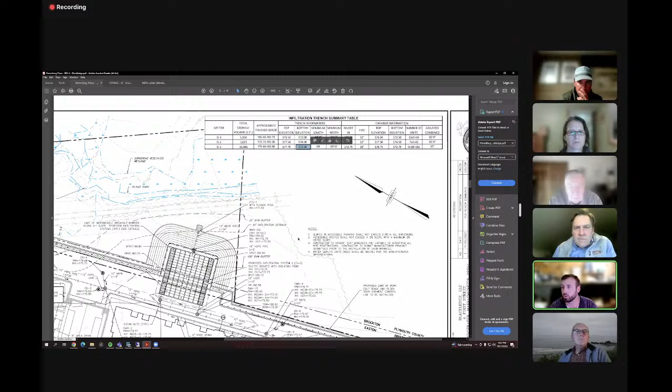The bottom elevation of the trenches is at elevation 172, which is the surface grade of the existing conditions under that. We found groundwater more than 4 feet below that by the test pits that were out there. So the water will infiltrate into the ground, and it really won't break out through the retaining walls in that area. It's getting pulled down by gravity through hydraulic conductivity into the groundwater system, and it is below the retaining walls, basically at that elevation.

And the mounding works in almost an upside down bell curve or a regular bell curve type situation where it spreads out, focused underneath the main part of the system, and then as the water infiltrates into the ground and hits groundwater, it slowly seeps out away and raises that, but then it falls back down. Groundwater is 4 feet below that system. So the flared end parts of that bell curve are 4 feet below grade at the lowest point there.

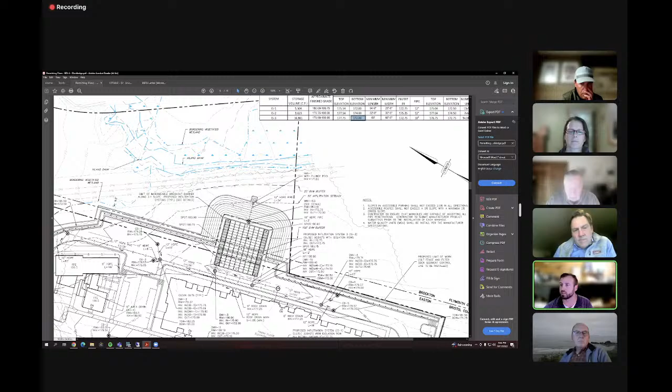And the highest point is actually underneath the chambers. So Damien, can you flip to the other ones? Because this one that you're looking at now, the large one, is primarily in Brockton, and the wetlands are all in Brockton. Okay, yeah. I mean, it's similar in all scenarios.

The main part of where the chambers are set, and then the bell curve and how the mounding and the interaction between the system and the chambers are the same. It'll be high during those stormwater systems. We'll have that arch underneath the chambers in which the water will infiltrate to the ground. It'll make the connection to the groundwater, and then slowly, as the water infiltrates, that mound will flatten out.

We set the distances and everything per stormwater standards. There's plenty of cover over the tops of these systems. The bottom of the chambers, again, these are 4 foot high systems, so the surface elevation, 180. You can see we're at 175 here. The bottom of infiltration chamber system, I believe this is 2, is at 74, and then also the other ones at 72. So those are all relatively at surface elevation or slightly below existing surface elevation.

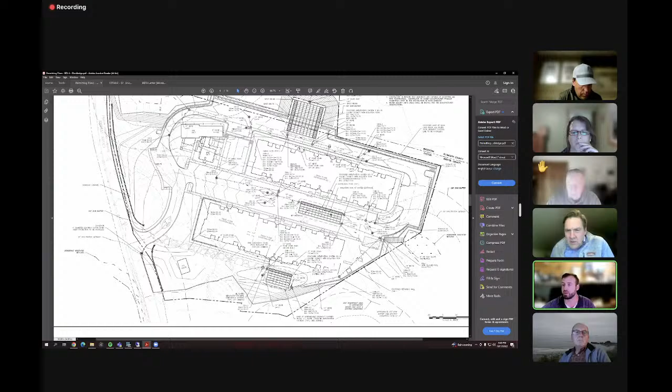So all of the other systems, everything is significantly higher above that. We're at elevation 180 at surface grade above this. So these chambers are deep in the ground. They're right up at 4 feet above groundwater at the tightest points. And the water should permeate down into the existing groundwater table, and have that bell curve edge outward.

So I guess the question that I have is, does water that doesn't actually make it into the actual infiltration basin, is it constrained at all by the retaining wall system? I can understand what happens to the water that makes it into the infiltration system, but I assume that there is regular groundwater that is meant to be handled by the regular ground as part of this development.

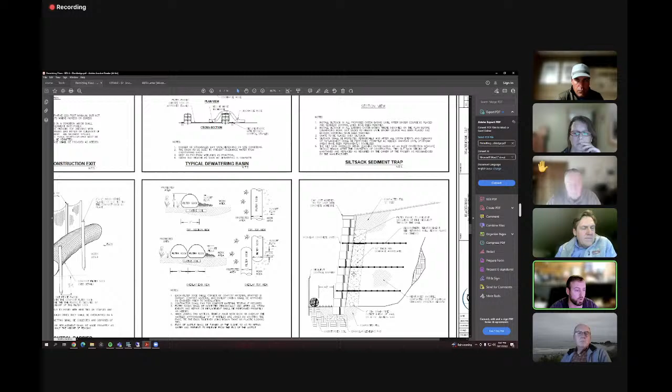The entirety of our site is above finished grade. So groundwater is below the surface elevation. So we are not restricting existing groundwater in any way, shape or form. The footings, the foundations for these retaining walls, are not very deep. They're only about a block or two below the surface, and then there's a crushed stone granular pad behind it. We're not by any means digging deep into the water, having these far impacts below surface grade. And they're held back by these tiebacks and the way that the blocks are built and constructed themselves.

So is the conclusion here that the groundwater is going to infiltrate to the normal groundwater level, which is below the level of the walls already? Yes.

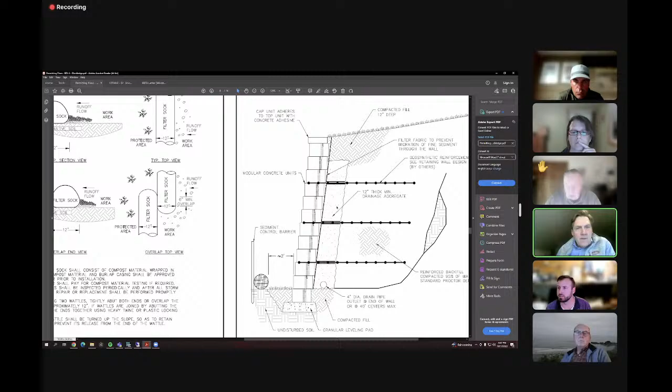Okay. Isn't this whole study based upon a late August sampling? When the samples were taken, it was among the driest years in recent history in the state. So I believe that what you're representing as the groundwater table is really underrepresented versus a normal year. Another thing that hasn't been mentioned is the effluent is going to be putting something like 2,000 cubic feet a day of effluent into this site.

I based that upon the data represented by the state for the average water utilization for different size apartments, and accumulated that, took no incremental data for the clubhouse, but that comes out to roughly 2,000 cubic feet a day. And I think that's in the northern part of the site. So I think there's some serious issues, and the McDonald-Morrissey analysis seemed to indicate that this should be redone in the spring to get an average representation, not in the middle of a summer drought reading. So I don't have any confidence in the data that is submitted and on the table right now.

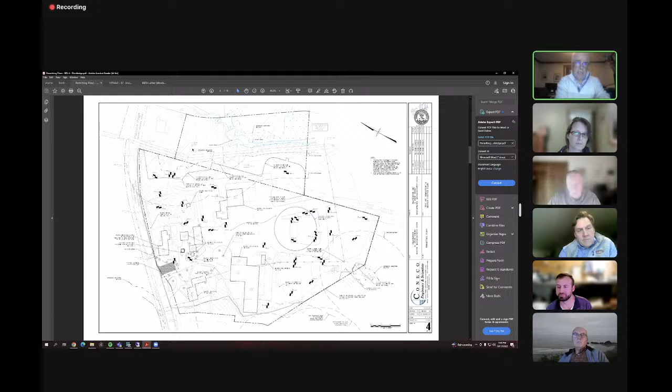In fact, we even eliminated one of the basins that were up closer to Union Street. Yeah, we eliminated that basin specifically on the basis of the setback from the leaching field. So, it's gone quite a ways in terms of what the design has gone through. And I feel very comfortable in terms of the prediction of the groundwater levels as they've been presented and as they are found.

So I guess that from my perspective, and then I'll open it back up to the commission now that you're with us, is that I'm trying to get the level of confidence necessary here to know that the discharge that's happening on both the subsurface system as well as the stormwater treatment systems is able to handle the volume that's going in here from a water standpoint, a runoff standpoint, or an effluent standpoint, and not impact either French Pond across the street or Dorchester Brook in the wetlands, even further south on the site.

So that's my takeaway at this point. I agree with Mr. Toohill's explanation earlier that we've probably concluded on the wetland delineation portion and the remediation and the replication standpoints that have been incorporated into the plan. And I think those issues are behind us. The issue right now in front of us is, are we going to impact either Dorchester Brook, the wetlands, or French Pond across the street with the increased water that's coming off of this site?

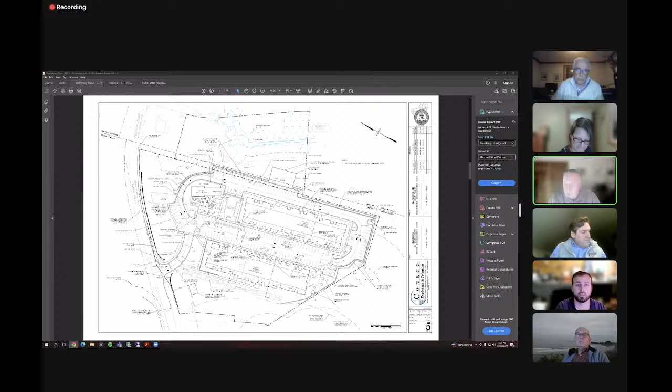Yeah, I'd like to get their comments on when they went to the state, they represented this as an unconfined aquifer. And I still believe that with all the retaining walls around, I have a hard time getting there. But when you add the 2,000 cubic feet a day of effluent, it kind of begs the question, if that's wrong, what are the effects going to be? And I hazard a guess they're going to go largely toward the pond across the street and into Dorchester Brook. And it was very notable to me that Mr. James would not comment on the effluents that were going to be released on the site. And I'd like to have his comments on why he doesn't stand behind those analyses.

Just hold up, Mr. James, one second. I just want to give Nate a chance to add anything in here. Then we'll circle back to that. I'll give you a chance to respond to that, of course, because I do want Mr. Benson's concerns addressed. I have no comment at this time. Okay, Mr. James or Mr. Dimitri?

Admittedly, I cannot speak to the groundwater discharge permit and the issues associated with it because we didn't review it. We specifically only looked at the issues associated with the stormwater system on the backside of the system. And I pretty much had to depend on the Commonwealth and Mass DEP in terms of their analysis and review of the groundwater discharge permit. The only thing I will say is that we are quite a ways away from it in terms of the stormwater discharge, the 3 infiltration systems. I believe we're about 175, almost 200 feet away.

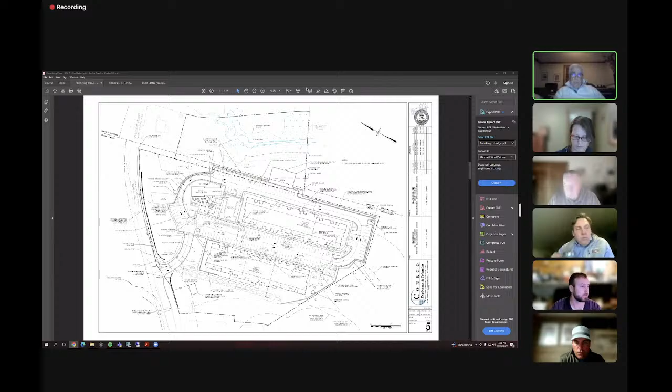Yeah, quite a distance. So in that sense, I really wasn't overly concerned with the overall issues associated with the mounding on the subsurface disposal system. How far away are you from the effluent system? I believe we're about, I'll let Damien answer that. Yeah, let me pull it up so I can get you a good number here.

So to the closest system, the underground chambers, is approximately 230 feet away. I'll just check them all. About 200 to the closest one, and that is the one along the westerly side of the site, the one that's closer to the riverfront. So that's the infiltration chambers to the leaching field. Yeah, so that pretty much confirms it. That's one of the reasons why I wasn't overly concerned about it and pretty much left the issues associated with the mounding analysis to the review by the department.

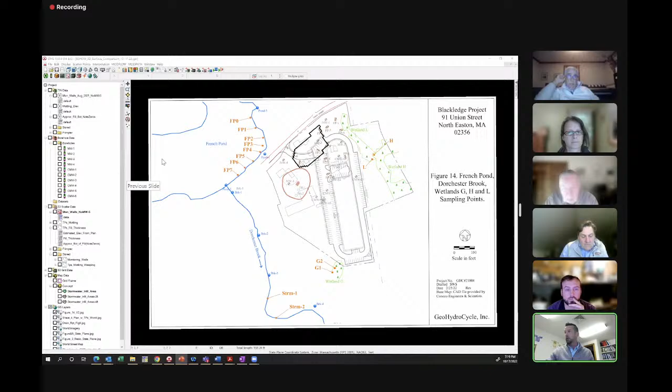Okay, so we've got this graphic up here. This is a site plan actually from the groundwater mounding analysis that was done for the wastewater system. So we can see some of the key site features on here. You can see the positions of the site monitoring wells. I can highlight those. Okay, where you see the yellow points come on, those are locations of site monitoring wells. They're screened in the shallow aquifer, so they support the direct measurement of the position of the water table, and that's where those August water level measurements were collected.

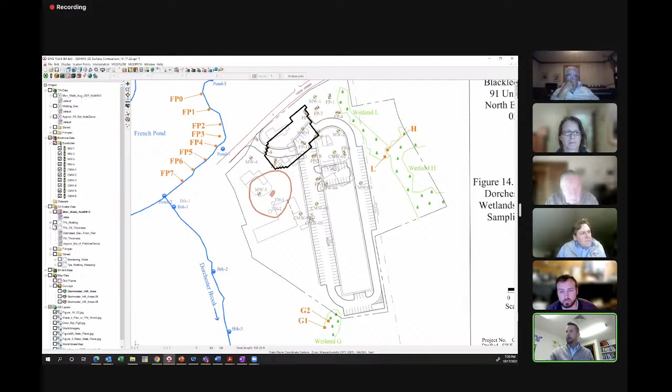We also have test pits on site. I can turn those on. These are the positions of the test pits. I can flip this figure off and show you that those gray locations coincide with, and a figure will come up here, coincide with these positions of the test pits. Okay.

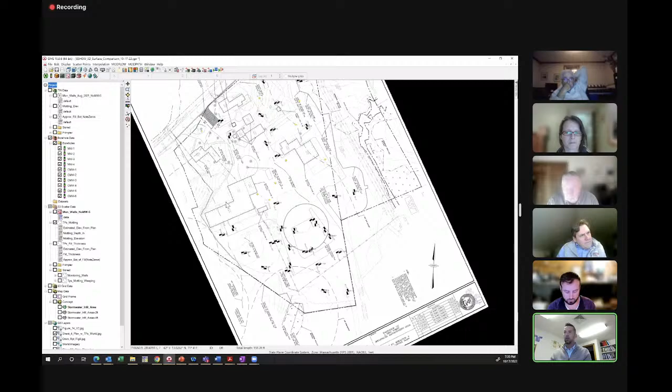So what we can do is, by taking the depths that have been reported within the soil column by the applicant, where redoximorphic features of soil mottling were observed, we can create a surface that represents where those are positioned in the subsurface. And we can do the same with the groundwater elevations that were measured in August of 2021. I'm going to turn those two things on here one at a time.

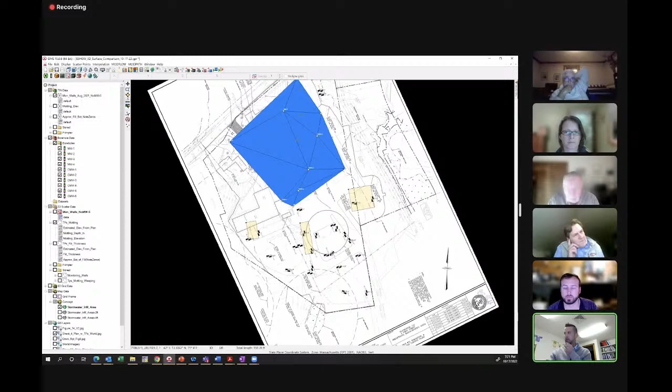Here's the groundwater surface. It only extends over a portion of the site because the monitoring wells don't extend into the southern area where the stormwater infiltration is proposed. And I can show you where that is. These yellow areas are the approximate extents of those 3 infiltration systems, stormwater infiltration systems. So we don't have monitoring wells in those areas, but we have some that are relatively close by. And now we can turn on the surface that represents the soil mottling elevations.

Okay. Now what you're seeing here is some areas where the red surface, so where the soil mottling occurred in the subsurface, does rise above where the blue surface is. And that would make sense, right? If those redoximorphic features were representative of the highest condition, that's what we would anticipate. That red surface should be above. And that does occur in the northern part of the site in certain areas where there is not significant fill.

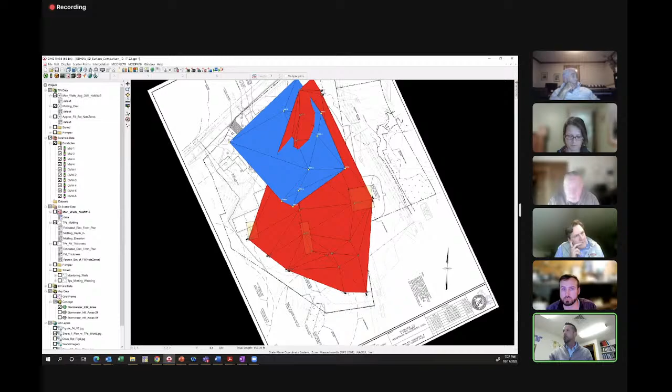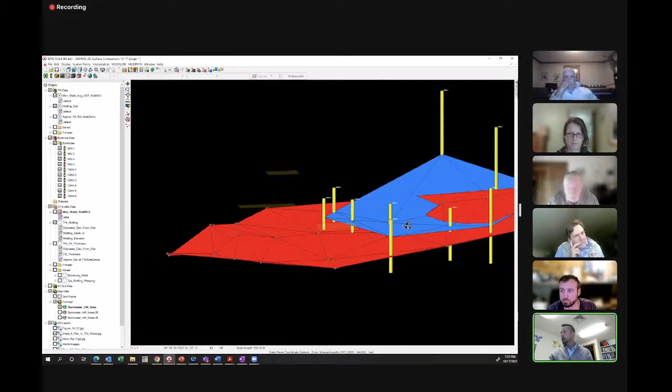But as you move south on the site, we start to see this separation. And if we rotate in space here, you can see, and there's vertical exaggeration here, but you can see what I mean, right? So we're moving south and we're seeing that blue surface rising above where the redoximorphic features were observed. So that's saying in those areas that the water table at this low point in time in August of 2021 was somehow measured at an elevation that's higher than what the applicant in general is using for their estimated seasonal high groundwater condition. And so that's dangerous for a variety of reasons, right?

There's also the 4-foot criterion. So if there's less than 4 feet between the bottom of the proposed system and the estimated seasonal high groundwater condition, you need to perform an additional step of analysis.

And that's a mounding analysis that focuses on the degree of change, temporary rise in the water table caused by infiltration from the stormwater system. And I'm a little concerned about what I heard before, because Mr. Dimitruk talked about, well, groundwater is not really going to change as infiltration occurs, but then he said it will locally below these systems. Well, that latter description is correct.

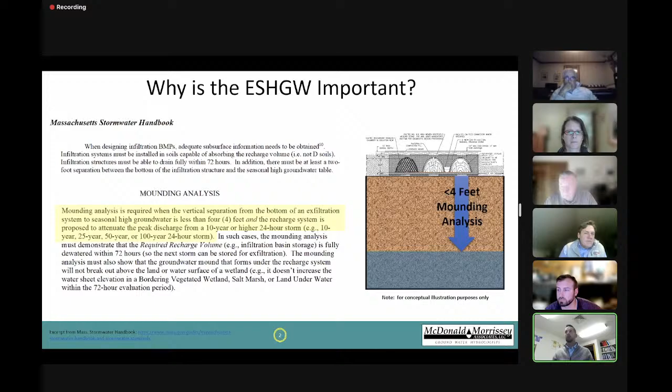Groundwater will rise below these systems, and the degree to which and the lateral extent to which that groundwater will rise has not been looked at all to this point. You only get a look at that if you perform a groundwater mounding analysis. And the risk of not performing that analysis is the possibility of adversely affecting the infiltration of these systems. And I talk about this in the letter.

If those systems don't infiltrate as they're designed, you're not going to get as much recharge. And that's one requirement under the stormwater performance standards. So that reduction could invalidate the compliance with that stormwater standard. And then you're probably going to see the system react by pushing more water out and increasing the maximum discharge rate. And that's another stormwater performance standard that needs to be met.

So to me, the issue here is that this estimated seasonal high groundwater condition is clearly, objectively, based on these measured water levels, low. The question is, how much higher is it? What I can say is I've reviewed Mr. James' comments about the applicability of the Frimpter analysis here, but I think he sort of misses the bigger point.

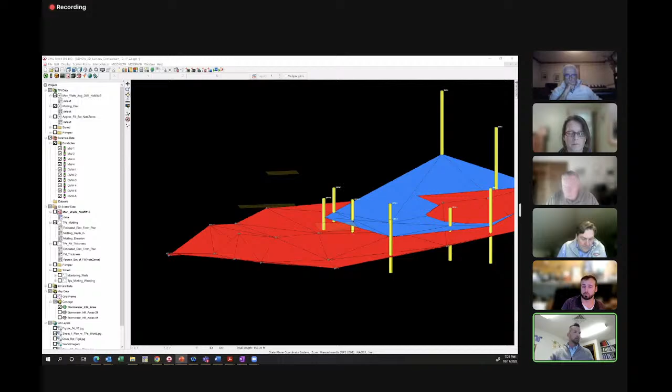When I did that exercise, it was simply to explore another option that can be used to evaluate estimated seasonal high groundwater conditions. I wasn't attempting to propose design levels. I was simply trying to support this observation that what's being used is too low. What really needs to be done here is to fill this information gap. And I think, according to the Mass Stormwater Handbook, the best option here is

pretty well spelled out. I'm reading from the Mass Stormwater Handbook here: when redoximorphic features aren't available, which I'll contend in this case they're not reliable, installation of temporary push point wells or piezometers should be considered. Ideally, such wells should be monitored in the spring when groundwater is at its highest, and the results should be compared to nearby groundwater wells monitored by the USGS to estimate whether the regional groundwater is below normal, normal, or above normal. That's what I'm proposing here.

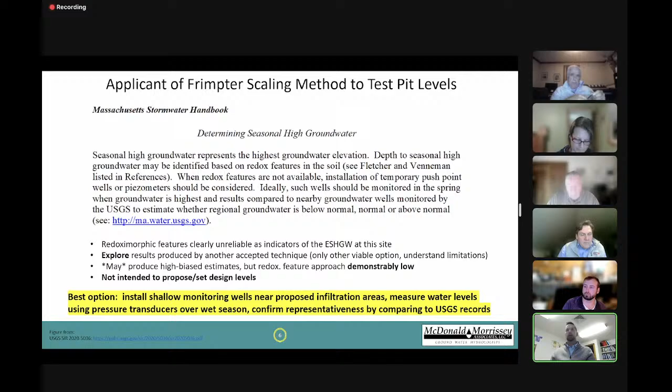We need to install additional monitoring wells in these areas where stormwater infiltration is proposed. They need to be monitored at a high temporal frequency using pressure transducers that go right in the wells, and they alleviate the responsibility of having someone go out and manually measure and the possibility of missing the high condition. And then you need to evaluate versus the USGS records to make sure you're getting a representative wet season captured in the data record. Okay, so that's one issue.

Just quickly, I want to touch on the wastewater issue. I can appreciate Mr. James saying he didn't review this. The fact of the matter is there is an analysis here. As I spell out in my letter, I've gone through a pretty significant effort to recreate the applicant's consultant's model to the best of my ability based on the limited information they've provided, which is incomplete. But I'm producing results that are almost identical to what their model is yielding.

And what I'm seeing are, excuse me, apologize, significant increases in the predicted volumetric flow rates to the neighboring water resources. In my letter, I state that based on my assessment, I'm seeing on the order of nearly 7,000 gallons per day groundwater discharge increase to the wetland that's highlighted on this slide, this portion that they identify as wetland L. That's remained completely unaddressed by the applicant to date.

And realistically, this model is not designed in a way that supports an analysis like this, but it would appear, based on communications we've seen between GHC, the applicant's consultant, and Mass DEP, they're using the model in this way. So there's a deficiency issue, and then there's a completeness issue that really are completely unaddressed at this point. So a number of concerning issues, and a lot to do to even get to the point of claiming that the stormwater design is in compliance with applicable standards, and that they can demonstrate that the proposed wastewater system isn't going to have negative impacts.

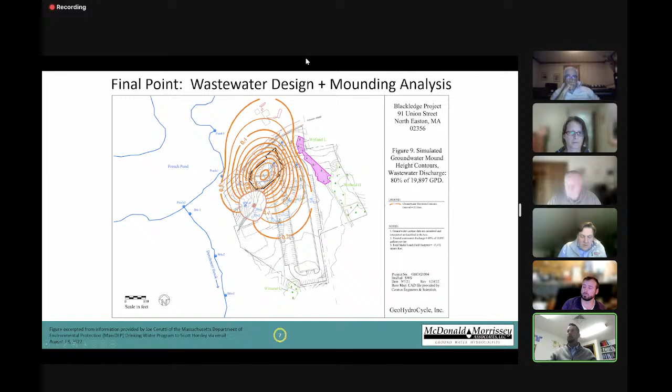Just before, and I know there's going to be some questions from my side, as well as probably asking for some input from our consultant on this. Just as a point of information, Jennifer, can you just clarify for me, is the wastewater treatment system at all under this permit, or is that strictly being handled by the state? That would be under DEP. That was actually one of my questions. Have those letters that you've submitted to us also been submitted to DEP wastewater division, and what's their time frame for review? If you know it.

I don't know if my letters have been submitted to DEP. I certainly haven't directly sent them. Ms. Pyle may have. We have not sent it to DEP yet. There's sort of a limited opportunity for outsiders to comment. We can do that. We can attempt to influence the process there. But I do think that it's within the commission's purview to look at the wastewater as well, because of the potential for alterations to the wetlands if they're being overloaded with large amounts of wastewater effluent or nutrients, and that would come within the definition of alter under the Wetlands Protection Act. And so I do think that you can look at it to ensure that the wetlands are protected.